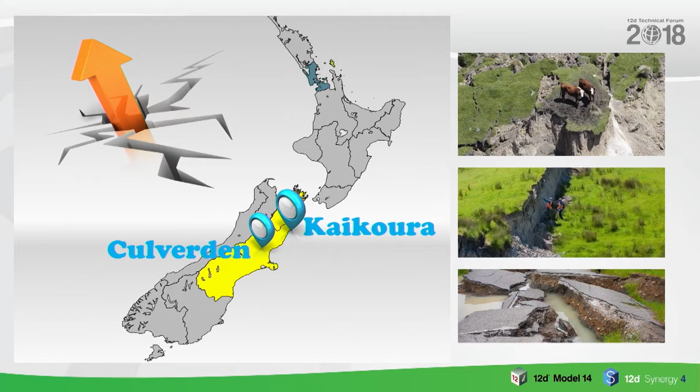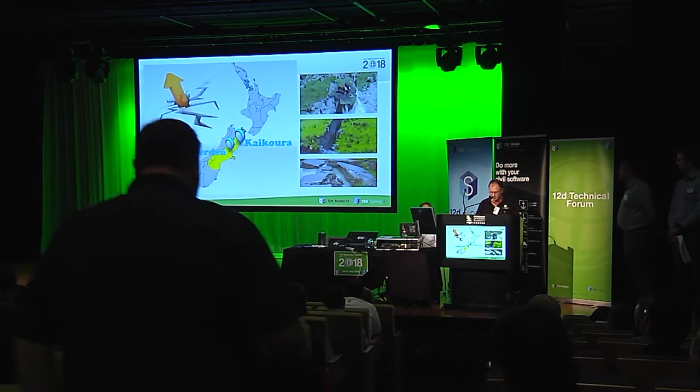The 2016 Kaikoura Earthquake was a magnitude 7.8 earthquake in the South Island of New Zealand. It occurred 2 minutes after midnight on the 14th of November 2016. The earthquake started 15 kilometres northeast of Culverden and 60 kilometres southwest of the tourist town of Kaikoura, at a depth of approximately 15 kilometres. Note that Kaikoura is famous for its whale watching. Ruptures occurred on multiple fault lines in a complex sequence that lasted for over 2 minutes.

Magnitude 7.8 is an enormous earthquake. It's around 32 million gigajoules of energy which was released in those 2 minutes. That's equivalent to about 8 million tonnes of TNT. That amount of energy could power the city of Christchurch for 3 years, or every home in New Zealand for three months. Tragically, 2 people died in the earthquake.

I have a short video clip that will bring some context as to why an alliance was created to tackle the damage created by the earthquake.

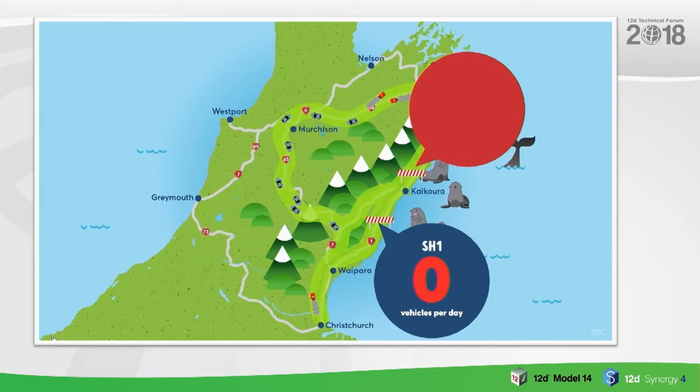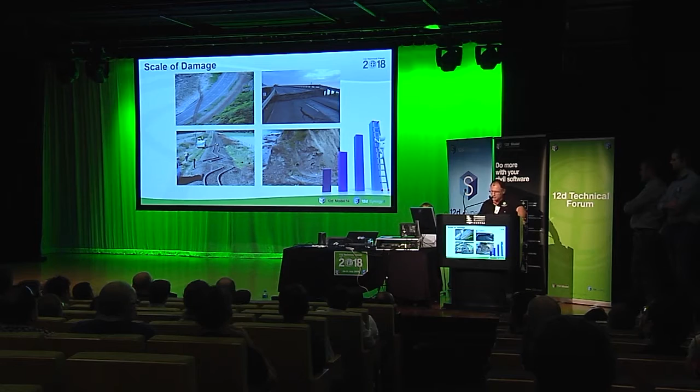The earthquake caused significant damage to the area, closing both State Highway 1 and the Main North Line between Picton and Christchurch. The major event disrupted the lives of many. Homes were damaged, businesses were closed, farms left with damaged land and no access to markets for their goods, communities devastated by the loss of trade from passing traffic and tourists.

The most common feelings regarding feedback from Kaikoura is the isolation, since the state highways were closed immediately after the earthquake. With close to 1 million cubic metres of rock and material falling onto the coastal transport corridor, Kaikoura and the surrounding rural communities were cut off.

In the initial response, there were over 35 groups, which included the Defence Force, Royal New Zealand Air Force, and Urban Search and Rescue. The New Zealand Defence Force, supported by warship HMNZS Canterbury, and including military and commercial helicopters, began the evacuation of more than 1,000 people.

The only way in, until the inland route was fixed, was by helicopter or by boat. On my helicopter flight was a doctor and a psychiatrist. Funny enough, the psychiatrist did pick up I was pretty nervous, and she commented that she had plenty of drugs to help if I needed any. On arrival was the number of choppers coming and going, 24 hours, the noise, something like out of Apocalypse Now. All I needed was to have Wagner's Ride of the Valkyries playing.

I worked with Kaikoura District Council evaluating asset damage. Incidentally, the American warship USS Sampson and others were in New Zealand for naval celebrations, so they were right there at the time of needed response.

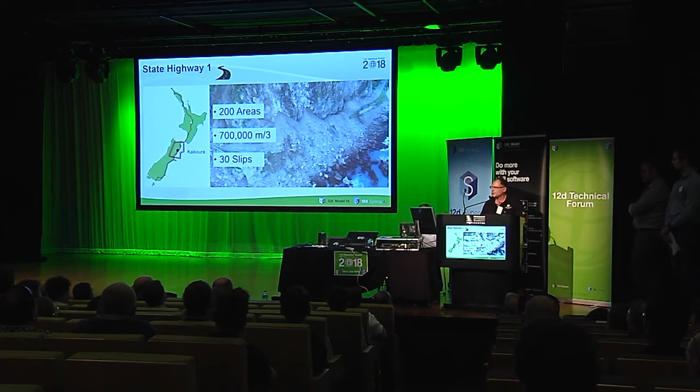More than 200 areas along State Highway 1 were affected by the earthquake. About 700,000 cubic metres—that's about 280 Olympic-sized swimming pools—of loose material dislodged by the earthquake fell onto the road and rail. More than 30 slips were identified south of Kaikoura and 9 major slips north of Kaikoura.

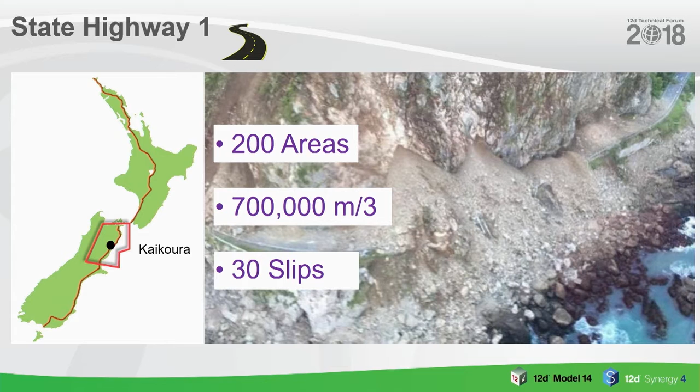Road access was quickly restored to Kaikoura via the inland route, Route 70, and on State Highway 1 south of the seaside town before Christmas 2016. Ongoing work and issues with flooding and additional slips have seen travel disrupted on both these routes through 2017 and 2018.

The closure of State Highway 1 cost the freight industry approximately $2.7 million in additional expenses per week, and cuts the annual tourism of Kaikoura.

Post-earthquake, the immediate challenge was diverting the drivers from the closed State Highway 1 between Christchurch and Picton to the alternate route. These roads are narrow and winding in places, with single-lane bridges and an alpine pass which can be treacherous when wet and particularly during the winter months.

Vehicle numbers on this route quickly rose fourfold to 4,500 vehicles per day, with 1,000 of these being heavy vehicles, up from 350 pre-earthquake. These increased traffic volumes impacted not only the road, but also local communities. New speed limits were introduced to improve safety for both motorists and communities. A $60 million improvement program was developed to upgrade the road so it could handle the extra traffic.

The priority was to restore access to communities that were cut off by the earthquake damage and establish a safe and reliable alternate route. The inland Route 70 via Waiau and Mount Lyford was identified as the best way to re-establish access to Kaikoura quickly.

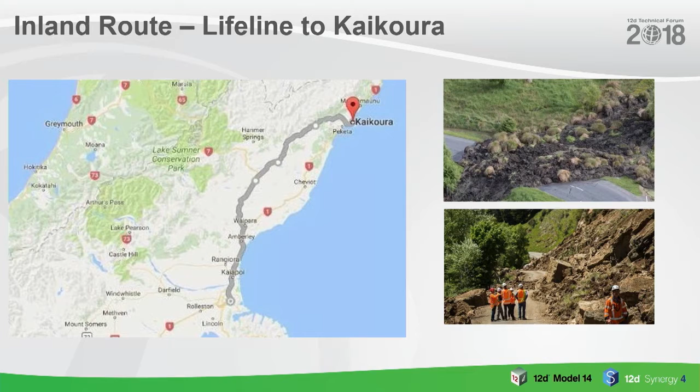The Main North Line railway between Picton and Christchurch is a critical part of the transport network for moving freight between the North and South Islands. Before the earthquake, about 1 million tonnes of freight travelled over the line each year. Along this line, nearly 900 sites sustained damage, including tunnels, bridges and embankments.

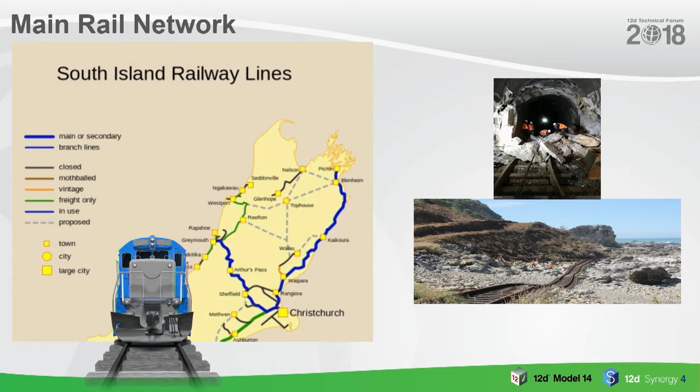The line was buried under more than 90 slips and landslides; 59 bridges and 20 rail tunnels were also damaged. The Main North Railway line was reopened in the middle of 2017. That's quite a feat.

The Kaikoura area is often referred to as where the mountains meet the sea. The transport network runs along a narrow coastal corridor, with some narrow sections where the hillside hugs the Pacific Ocean. While this offers spectacular views, it is also exposed to rapid weather changes.

Rebuild work has been interrupted several times because of weather and seismic activity. Tropical cyclones Debbie and Cook hit in April 2017. This heavy rainfall resulted in further damage, and work had to be halted for a number of days as more rock and material fell from the already damaged slopes. Working in such a dynamic environment has been a challenge throughout the recovery.

Huge efforts have been made to protect and restore Kaikoura wildlife, which includes the largest environmental team seen in a New Zealand construction project. Over 11,000 seals, many repeat offenders, have been moved by seal handlers. I've got a short video after this last piece I talk about, so I think you'll find that interesting.

Seal handlers normally work in 24-hour shifts to match the schedule of NCTIR's roadworks program. Also, the rare Ohau rock daisy only grows in the bluffs around Ohau Point. Abseilers collected plants around the point which have been successfully germinated in Nelson for planting in autumn.

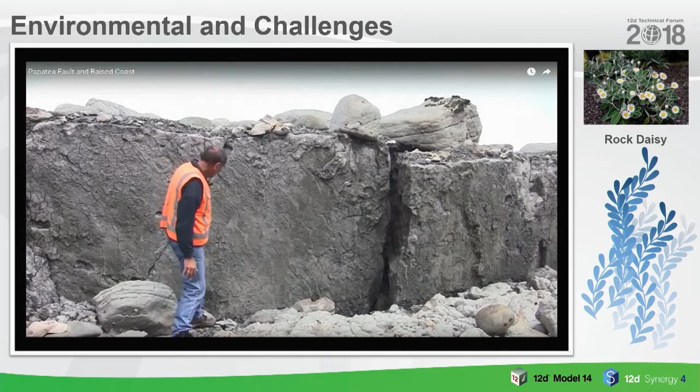Papatea fault, a few kilometres south of the Clarence River Bridge on the Kaikoura coast. Looking at the fault plane, the plane of movement along the fault itself, this side here has moved up by about 1.5 metres, and we can see the gravels here and on that side. What's really interesting is we can see lines of movement on this fault plane moving down a little in this fashion. That means it looks impressive that we're standing here 1.5 metres high, but in fact most of the movement has been along a plane something like this.

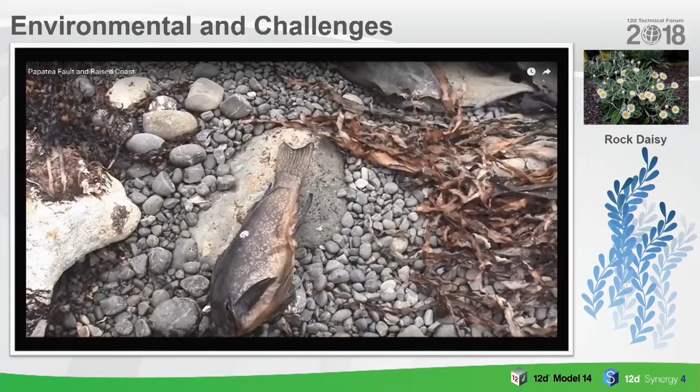So this side here has moved forwards by many, many metres. These fault scarps form very, very quickly, and we know from earthquake physics that this fault scarp probably ruptured across here at a speed of about 3 kilometres a second. So this has uplifted a very large area of new reef here, and the locals describe not the earthquake noise, but the noise of water running off the top of this uplifted platform. They said the noise was just horrendous.

And on the downthrown side of the fault, it's actually still come up by about 1.5 metres. On the other side, there's as much as 6 metres of uplift.

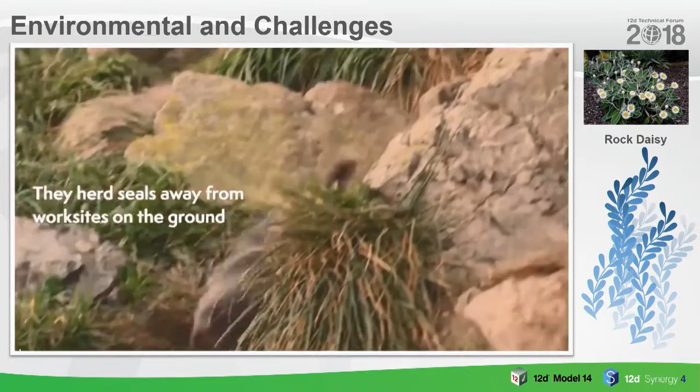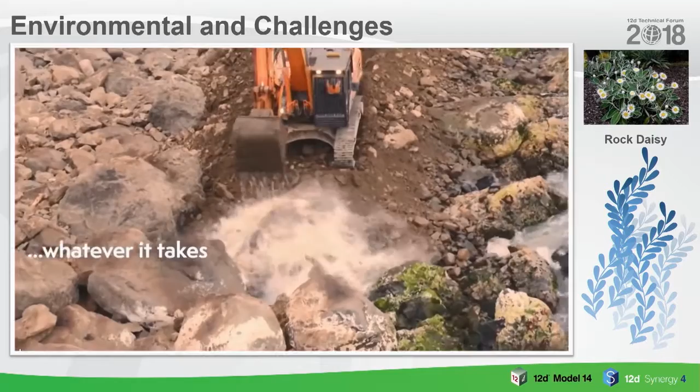There's still one under there. Okay, yeah, and that little pool. Yeah, you see it down there? Yeah. And then that's it, something like that one, and come out. So just keep the water out of it.

Hello and thank you, Charlie. My name's Stuart Hamilton and I'm a senior civil designer with Aurecon based in Christchurch, New Zealand. I've been a 12d user for around 20 years where I've designed everything from state highways to subdivisions, underground infrastructure, cycleways, irrigation dams and much more.

In recent years I've been involved, as well as administration, in the 12d Synergy. But that's not why I'm here today. Since July of last year I've been seconded to the design team as part of NCTIR, as the roading and 12d design technical lead. There have been plenty of challenges along the way, but we have seemed to overcome them with some lateral thinking, technology and the support of 12D solutions.

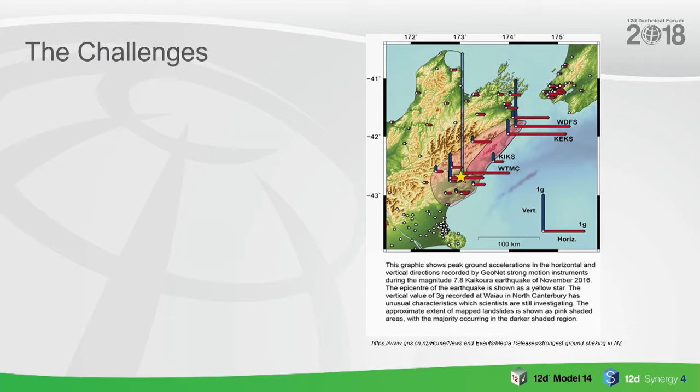So what have some of the challenges been? As Charlie mentioned, this was one of the most complex earthquakes ever recorded. To put it lightly, it belted the South Island, shook the rest of New Zealand, and was estimated as a 1 in 5,000 to 1 in 10,000 year event. So as a starting point, Mother Nature had laid down the gauntlet, and it was up to NCTIR to work around her and get the transport network operational and Kaikoura open again.

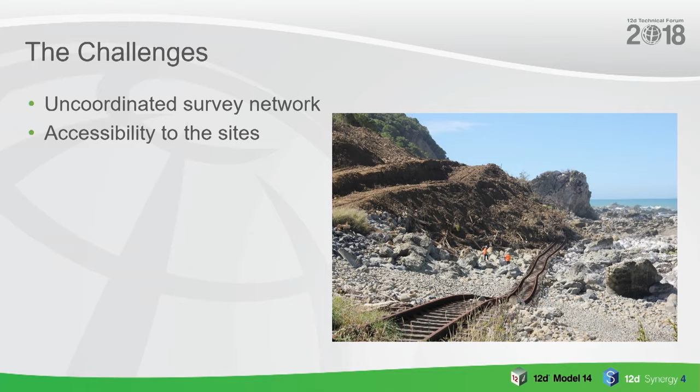So, what were some of these challenges? Uncoordinated survey network: the network of survey benchmarks along the coast and surrounding areas was completely out of alignment and would need to be recalculated. Accessibility to the sites: the quake had blocked the roads and brought down material. This was very unstable and meant access was going to be tricky, not only physically, but also from a health and safety point of view. Risk of rockfall: the quake had dislodged many large rocks, with plenty more hanging above the road and rail, looking for opportunities to roll down the hill.

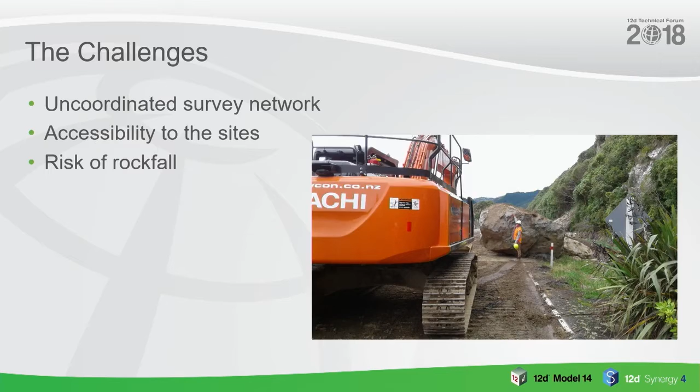How to capture the terrain: the road and rail was wedged between the Pacific Ocean and the Kaikoura Ranges, with cliffs rising steeply 200 to 300 metres above the coastline. How to manage and distribute the data: the amount of data this project was going to generate was unknown. The data needed to be managed, as well as means to manage the design process and the rapid changes that were going to occur throughout this project.

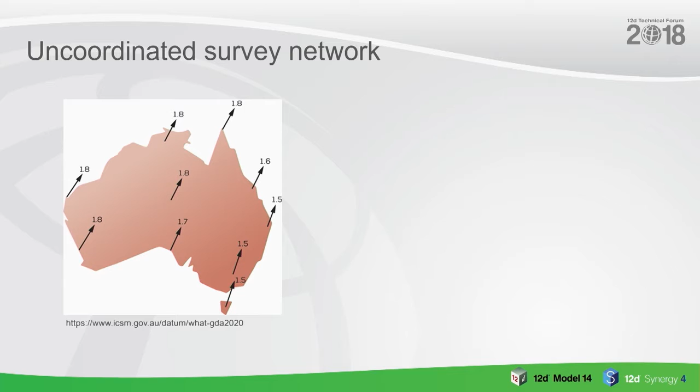So how did we deal with them? The uncoordinated survey network: in terms of this, Australia is currently implementing a new geocentric datum to take into account 1.5 to 1.8 metres of continental drift that occurred over 26 years. At NCTIR, the survey team had to take into account tectonic movement, which had moved things up to 12 metres in 74 seconds.

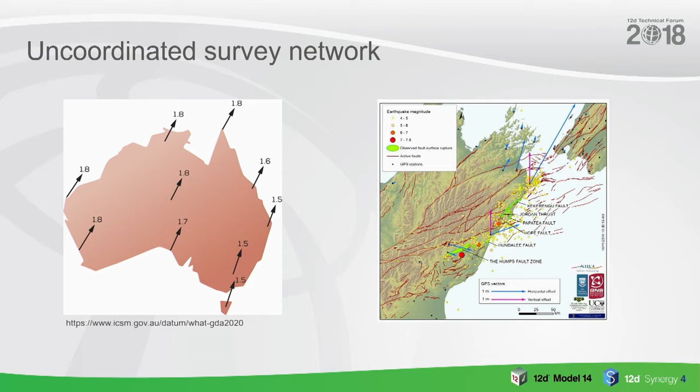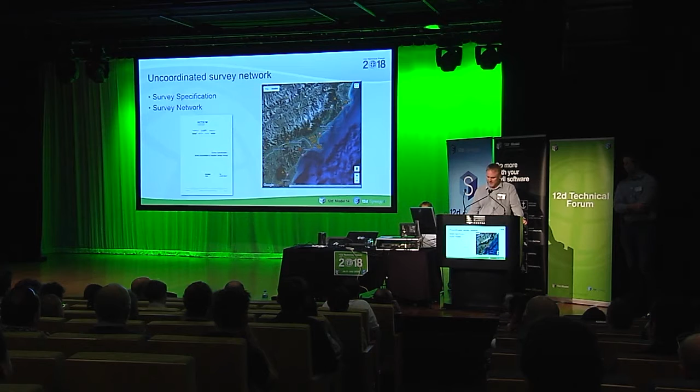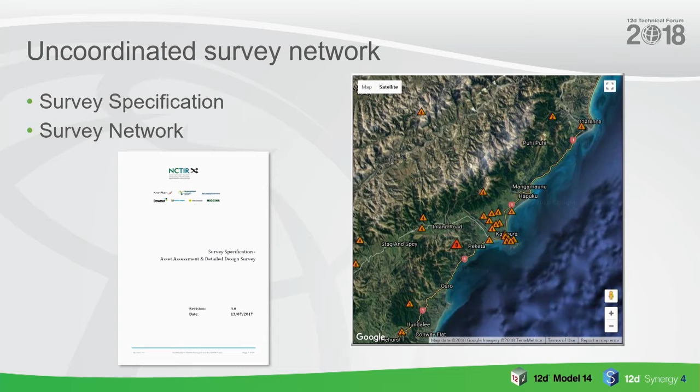A revised local survey network was developed and incorporated into a survey specification that was provided to the contractors who went out to capture the survey data. The survey specification outlined the definition of the survey network, the requirements on how various elements should be captured, and how the data was to be delivered to NCTIR. This was important as the survey team had workflows that processed this data into 12d master projects.

Having the data in a predefined structure allowed the chains to process the data and have it available. As for how to capture terrain, as many of the sites had limited or no access, the old chainperson and staff method was not really going to work for a lot of these sites.

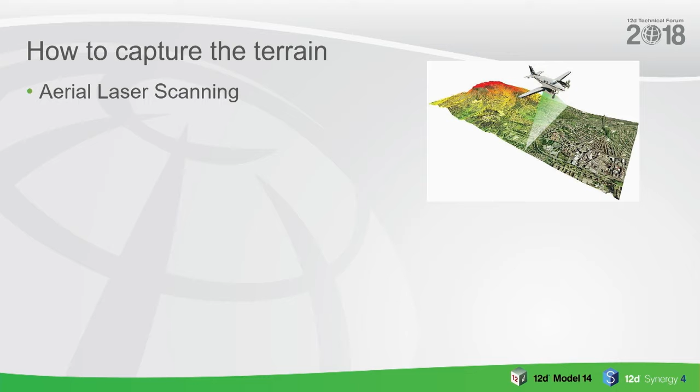Just after the quake, aerial LiDAR and photography was flown along the corridor to provide a basis for moving forward. LiDAR surveys have been repeated several times over the project lifetime and are building a picture of the coastline as it has evolved over 18 months.

We couldn't really give up on traditional survey methods, and these have been used for establishing the control, filling in areas of specific requirements, and setting out of the construction projects, which made getting the underlying coordinate system right.

Vehicle-mounted laser scanning has been used during the project, with a vehicle driving the length of the corridor capturing as much data as possible. This, combined with a panorama camera mounted to the vehicle, has given the design team at NCTIR effectively a street view every run.

Ground-based laser scanning: scanners have been used in tunnels and other areas to collect detailed point clouds. These point clouds have been incorporated into the design and many tunnel repairs.

Hydrographic surveys of the seabed have been carried out to understand the effect of the quake on the seabed and the potential changes to the coastal processes. UAVs have been used along much of the coastline to capture slip sites and other hard-to-get areas. These have provided an excellent means of getting data without putting people into areas that were still potentially unsafe.

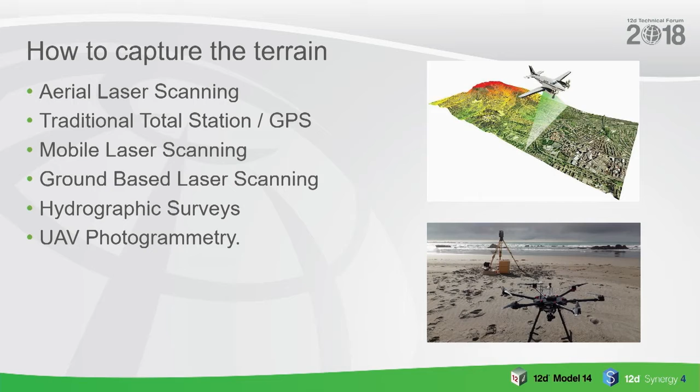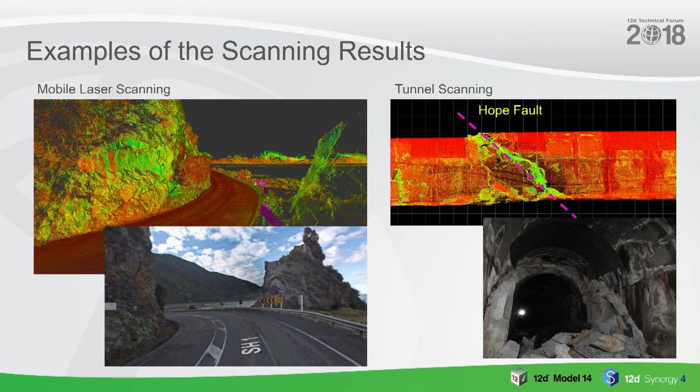So, how did we manage the data? A network drive was the perfect choice. It had been used for many years, had a common interface, and was a place that needed a little setup. However, it did have its drawbacks, with no real document management and required permanent connection for remote users - these sort of things really all counted against our use of a network drive. Having said that, we are still using a network drive for some of our workflows.

GIS - another option was a GIS platform. However, this yet again did not meet the design tools requirements. Having said that, the GIS system that NCTIR has developed forms a major part of our project and provides the team with extremely valuable information.

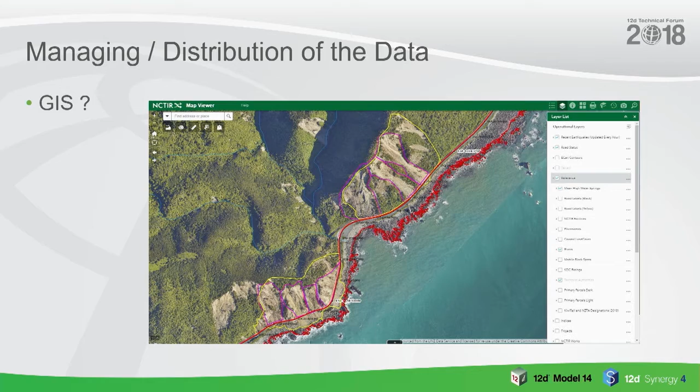Within the GIS system, we have access to client assets, property information, live site reports, road and rail features, and much, much more. We have developed workflows to publish data from 12D so that it can be seen by non-12D users in the GIS space.

This has proven valuable, especially in meetings when 12D designers are not available. General users can overlay different bits of information from the layers in combination with the design strings from 12D. The GIS system is utilising the network drive and reads some of the raw data that is provided from various NCTIR sources.

But in the end, it was decided a document management system was needed. The question was which one to use. NCTIR was already using a document management system for the construction team, however this yet again did not meet our requirements. Given we were already using 12D model for the design side of things, 12D Synergy would be the perfect fit and was selected as the preferred design document management system.

Within Synergy, we are supporting many systems. All 12D projects are hosted within Synergy.

Calculations, report specifications, emails and many more documents are managed in this system. Drawings, using AutoCAD, are hosted, updated and managed within Synergy. We have drafting staff working in different parts of the world working on drawings in coordination with the teams in Christchurch. We even have Revit users who store their final models within Synergy to ensure all the project data is in one location together.

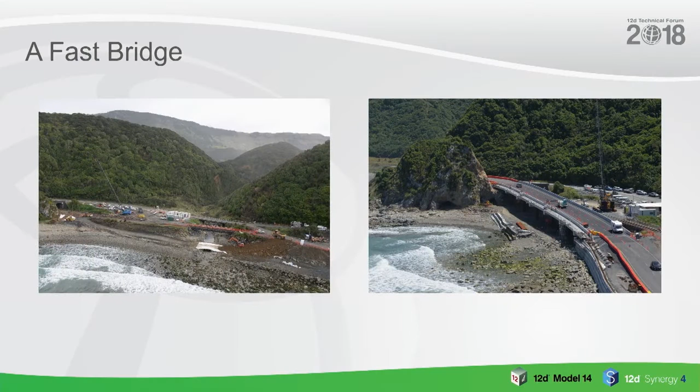So as a sort of design and construction summary, here's a few examples of some of the projects that have come out from our system. A fast bridge - the construction team delivered the fastest multi-span bridge to be constructed in New Zealand, with a 7-span, 144 metre long Irongate Bridge constructed in just 14 weeks from ground up.

This was in addition to 3 other single-span debris flow bridges further along the coastline. In total, 120 24-metre long bridge beams had to be transported from around the country along roads that were not designed for vehicles longer than 30 metres.

There were 2.5 kilometres of seawalls constructed, with many of these foundations starting in the middle of winter in 2-hour windows that aligned with low tide, day and night. At one point, the NCTIR project was consuming all of the available cement in New Zealand.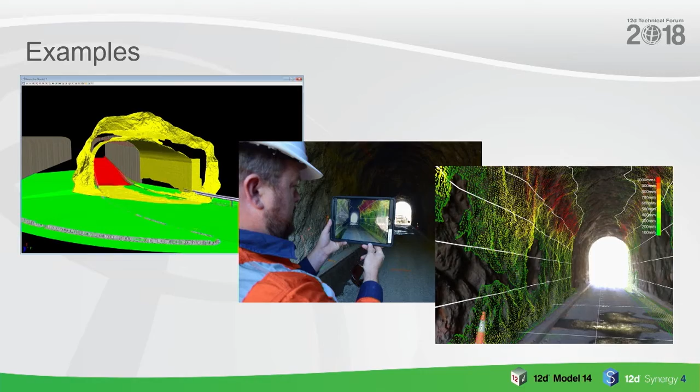From a digital development point of view, augmented reality has been utilised to provide the tunnel construction team with a digital milling picture of work required within 4 road tunnels. The tunnels were modelled in 12D using original scan data provided. Tri-mesh profiles were created using 12D snippets, and then through some third-party processing, published onto iPads. The crews were able to walk along and get an idea of where the material needed to be removed.

Safety has probably been, and the biggest goal was opening the road. This was to get the transport network open again and reduce the demand on the alternate route, which had never been designed to carry the additional traffic. It has also meant getting the town of Kaikoura open, ready for business.

On the 17th of September 2017, the first freight train since the quake travelled along the corridor. Then on the 14th of November, exactly 1 year after the quake, the harbour was reopened for business, which allowed one of Kaikoura's main attractions, whale watching, to return.

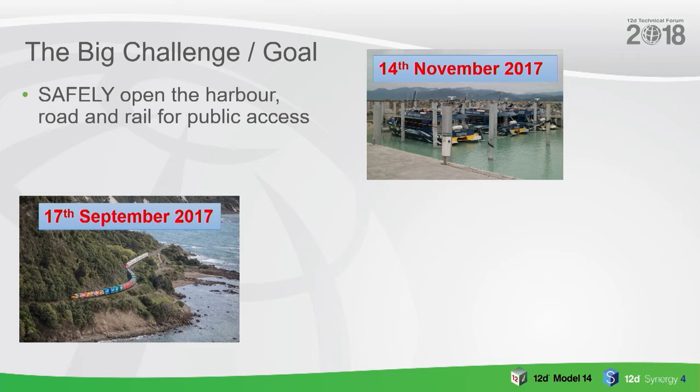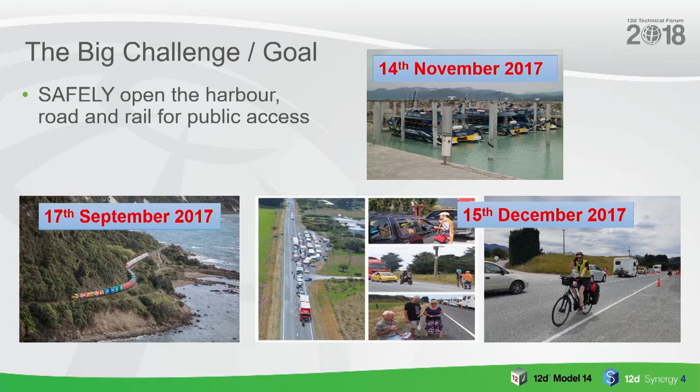Then on the 15th of December, 1 year, 1 month and 1 day following the quake, the road was opened to daytime traffic. This was then followed by 24/7 operations returning to the road at the end of May this year. The story of NCTIR does not end here, as the project has another 1.5 years of design and construction to complete. I'm sure there will be more stories that will come in the following years about this project.

Oh yeah, how do we deal with the Rockfall Risk? Well, there was scaling, helicopter monsoon buckets, water cannons and other attempts, but sometimes these rocks just didn't want to move, and the Mythbusters approach was taken. Hopefully it works.

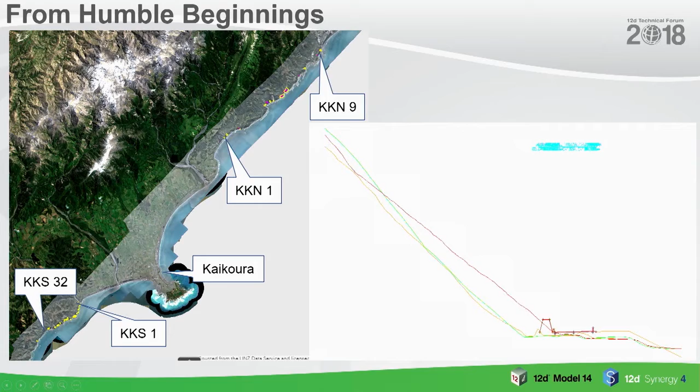And there was a slightly confusing naming convention where Kaikoura was home base, and as you worked out from Kaikoura, you had Site 1 in both the north and the south. So it was a good way to understand the project because people were referring to Site 1, N1, S1, all this different stuff.

And I was using 12D in a slightly different way than what NCTIR was set up for. In Synergy, each individual site had its own synergy job, but I wanted to share in stuff from multiple master projects across many different jobs, which meant I was constantly challenging the system support team of Dan Winter and Charlie, and the survey team, just trying to make my own special project which brought all the data in. This pestering of the system support was a running theme throughout my time at NCTIR.

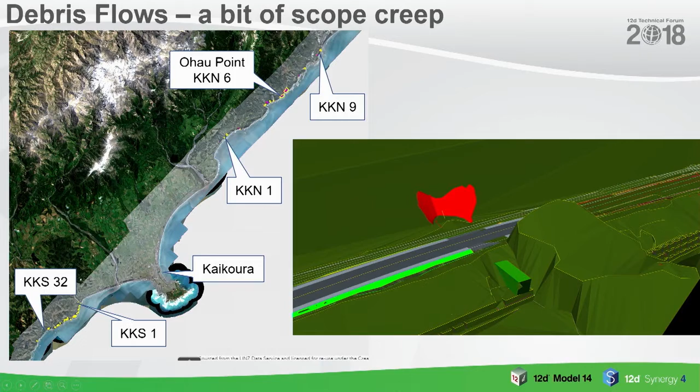The cross-section work wasn't enough of a workload to justify me being there full-time, so I also had a small job for a stormwater engineer, modelling box culverts to go under the road just south of Ohau Point at 3 locations. The purpose of these 3 by 3 metre box culverts was to pass debris flows through them and underneath the road and rail. This job suffered a little bit of scope creep as the debris flows were less of a concrete slurry consistency and more of a boulder and tree consistency.

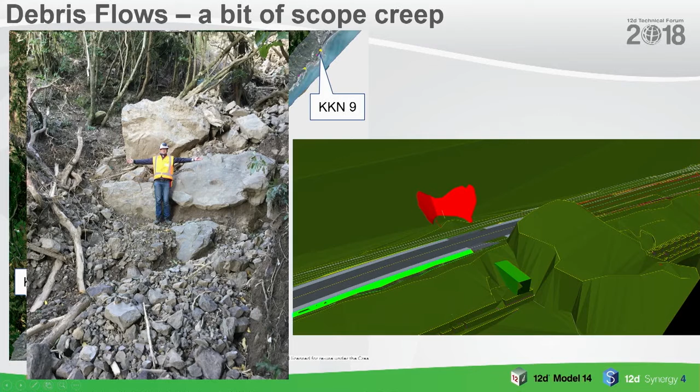So that's me there, I'm about 2 metres tall. That rock is a little bit bigger and wider than me. Some of the rocks coming down off the hillside were about the size of caravans, and the tree trunks coming with it were 5 to 6 metres long. So a 3 by 3 box culvert wasn't really going to cut it.

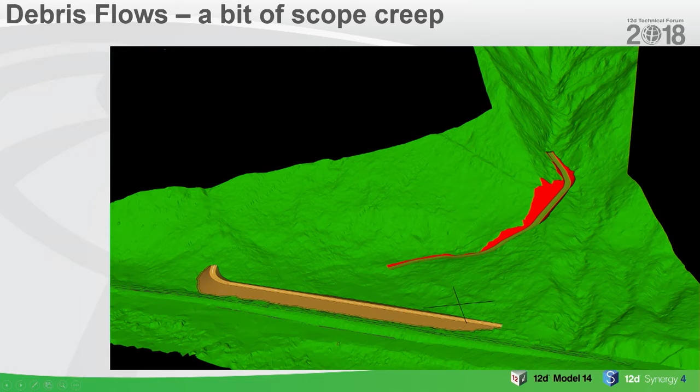So more of these debris flows kept cropping up. Pretty much whenever we had a heavy rainfall, there'd be a new slip appear, so the progress we were making on site was constantly being knocked back. The two cyclones which hit the coastline at Easter 2017 brought quite a lot of extra debris flows down.

I've modelled dams in 12D back in my home organisation, so I knocked out a few conceptual designs of bunded areas to capture these flows, drain the water out of them, and then go in later with earth moving equipment to remove the rock.

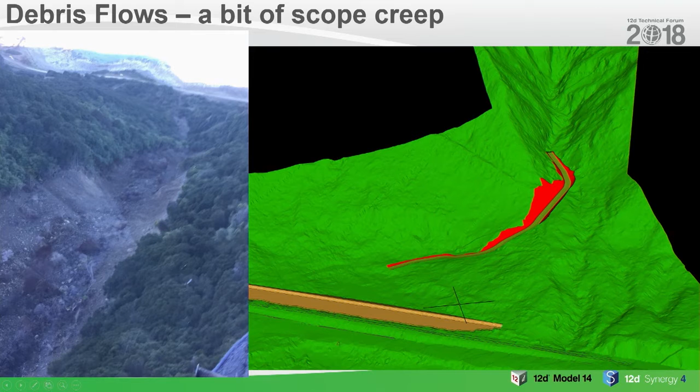So this is one of the sites here. That's the source area, we're about halfway up in a helicopter. It's about 200 plus metres tall, and the amount of material sitting up there was going to take 5 to 6 years to come down based on the rainfall we were getting.

So the plan was to direct the flow, instead of coming this way and over the road and rail, direct it round to the side and into this bunded basin area. This is another bund that we put in to protect the state highway, and here's some pictures from the site.

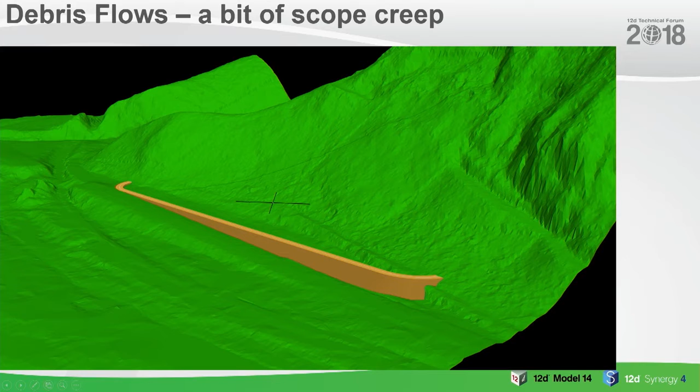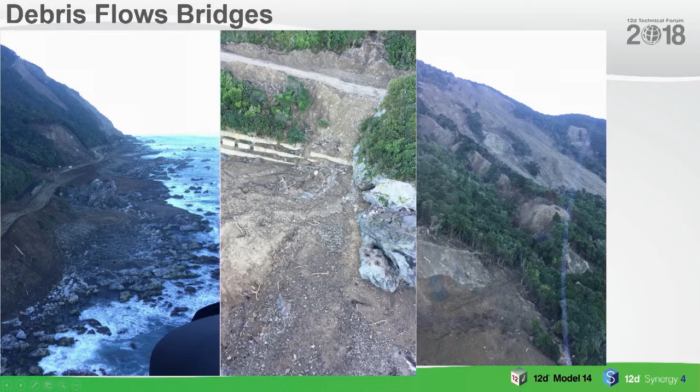Back to those box culverts. So this was what the sites looked like, a lot of muddy debris washing down. This is sites 4 and 5, where these debris fans were coming out, and this is site 6, just south of Ohau Point, where that large boulder was that I was standing next to.

And this is the source area of the material sitting up there, which is going to take probably 5 to 10 years, we estimate, to come down. So we proposed putting in some temporary bridges, like Bailey bridges, but they were speed limited to 30 kilometres an hour, so that wasn't really a permanent solution for a state highway.

So we opted for some permanent bridges. This is probably one of the first conceptual designs, and this is the final product. This is the two sites - couldn't get the raster to drape on this tin, so I just had to grab it without. But you can sort of see the fan of material which is building up here. And it was a total road vertical realignment, and we also had to retain the rail embankment.

I also took over a road and rail alignment from someone who left the project about a month or so after I arrived, unrelated, and so I got stuck into the road realignment. He'd already done the rail, which was a bit unfortunate because the rail was on the outside and the slips were on the inside, and I had to fit the road in between the two, so I was constrained by previous design decisions.

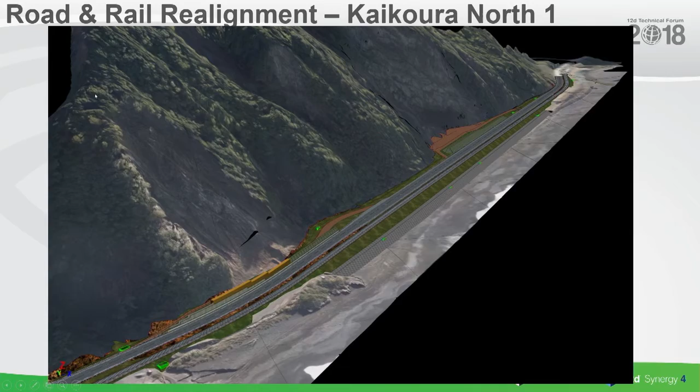So this is site 1 in the north. It's got two slips here, slip 1A, slip 1B, and pretty much the design was to put walls in front of the slips with access behind so you can remove material, and nice big coastal protection riprap to stop the rail from eroding.

So this is looking at the start of site 1A, it's about 5 metres tall. Just mass concrete blocks linked together, sitting behind this, which would absorb the impact from the rock falls, so they say. And this is the road which kind of got squeezed a bit between the rail, which was already built, and the slips. This is sort of midway, that's site 1A, that's site 1B.

And we have a bunch of stormwater to take the water from over here and out to sea. And this is at the northern end, so it was about 1 kilometre long. Quite a good project to get involved in.

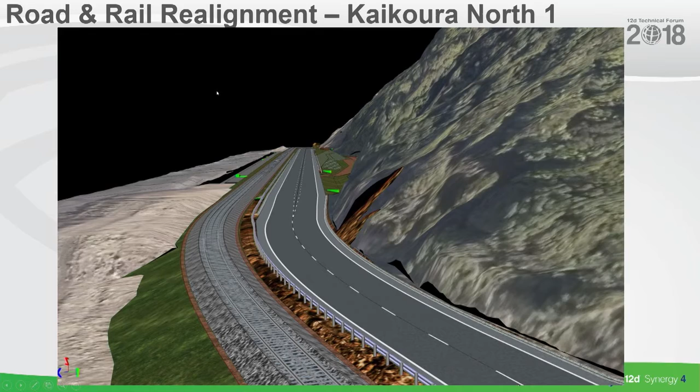So through this project, I realised there wasn't a consistency in the output across the 12D geometrics team - different long section plots, DWG outputs, CAD wasn't going onto preset layers, the naming convention was out of date. So Dan Winter, he was responsible for all of this, but he didn't have time to deal with the backlog of 12D model changes because he was also migrating the NCTIR design team onto Synergy.

He got a bit sick of me pestering him, so he gave me the job to do it instead. So I suppose the motto was, don't pester people too much or they'll just get you to do it yourself.

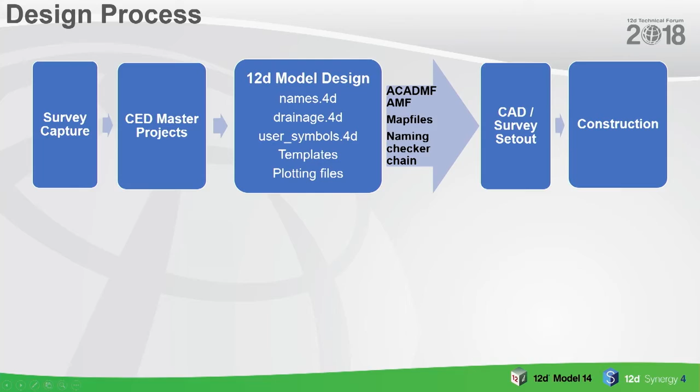This is the simplified design process at NCTIR. Survey and asset information is captured by field surveyors in Kaikoura in a shorthand code. It's processed by the survey team in Christchurch into a longhand code and saved in the central engineering database master projects. The designers share data from the master projects and design based on agreed naming conventions. They export their designs into DWG format in plan and section plots for drawing production in AutoCAD, and export the 3D design strings and tins in 12D format to the survey team in Christchurch. The survey team checks that the design matches the naming convention before remapping it into field survey shorthand, to allow the field surveyors in Kaikoura to set out the design and the contractors to build it.

The overall role of the 12D systems administrator is to work in these two boxes, making the design process run smoothly and efficiently inside 12D and when exporting from 12D. This is especially important on the NCTIR project because we were time constrained, not cost constrained, which was quite unique.

The overall philosophy was to keep the modifications we made as lightweight as possible, only customising files where needed to make it easy to walk away from this and have someone else pick it up. Also, if 12D had a major update, we wouldn't have to do a bunch of work to keep things running.

So I started on clearing the backlog, updating or creating files in the user and user lib folders to ensure consistency throughout NCTIR. I reduced the drainage.4d file down a lot, sorry Charlie, to stop the confusion amongst designers and speed up plan and long section. So instead of having three different pit types for the same pit, we just had one.

That really helped going into CAD as well, because then we could do long section and plan plots of that. I created a bunch of plot PPF files for long section and cross sections, for road and rail alignments. Eventually you could export from 12D as a DWG XREF, and it would appear in the drawings in the correct layers with the correct colours and line styles, with very minimal edits required by the caddies. So it really sped up the whole drawing production.

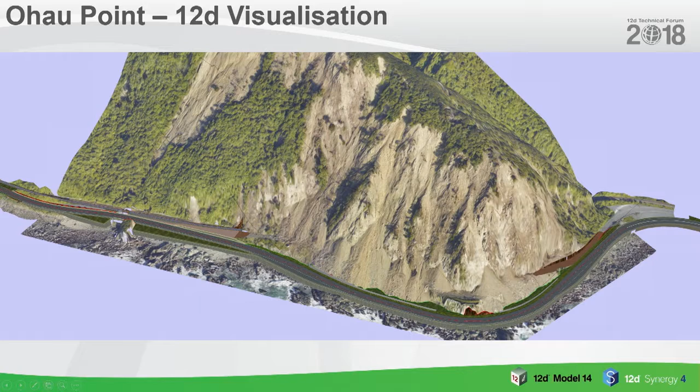So this is Ohau Point in 12D visualization. Looks pretty good, but unfortunately we went to another package to spruce it up to the next level. So this is the final product, with Ohau Point over there. These were used for public facing stuff, and also I think a bit of VR as well for the clients.

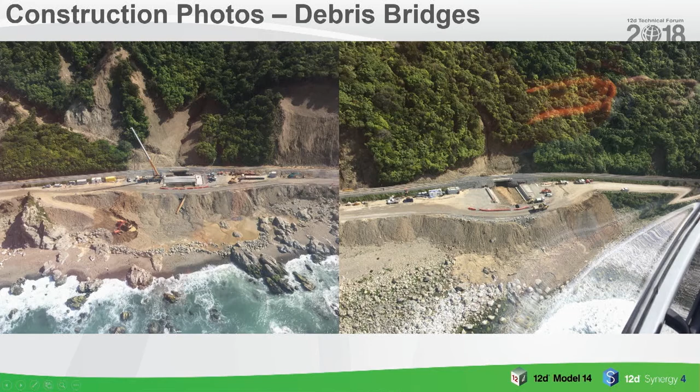Then the debris bridges - this is debris bridge 4 and debris bridge 5, under construction, looking back over Half Moon Bay. The reason I was out there was we were looking at all the source material sitting up above, which was kind of wanting to come down between the two bridges, which would have been a bit embarrassing. So we were trying to train it to go either side into the two channels.

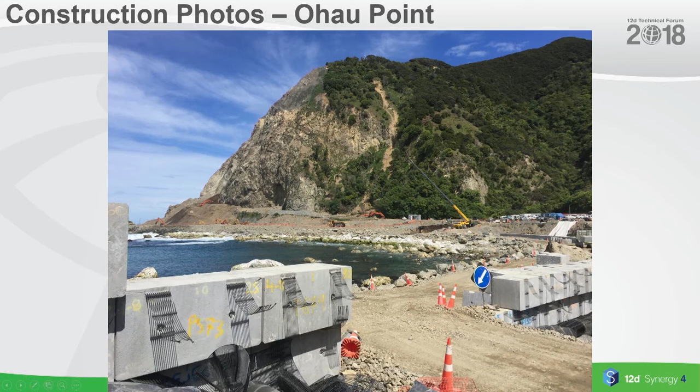This is Ohau Point under construction, looking from site 7. Pretty massive thing - the top third of the hill is covered in a chainmail mesh to stop rocks pinging off it. So that's it.